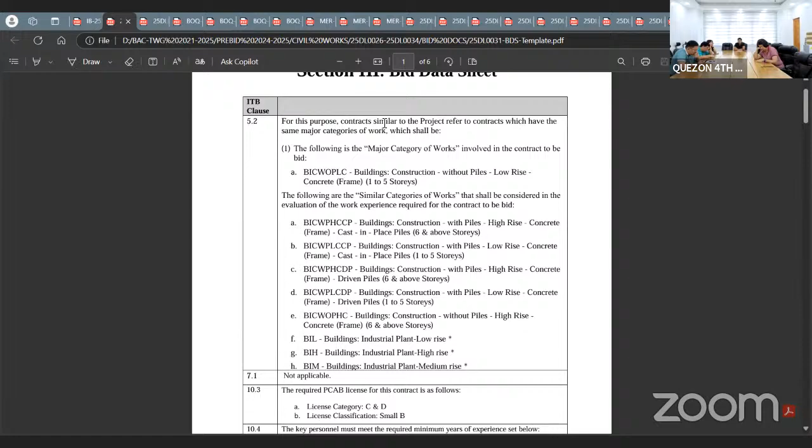Building construction with piles, high-rise concrete frame, driven piles, 6 and above stories. Building construction with piles, low-rise concrete frame, driven piles, 1 to 5 stories. Building construction without piles, high-rise concrete frame, 6 and above stories. Then building industrial plant, low-rise, medium-rise, and high-rise. So that is for contract ID 25DL0032 and 25DL0033.

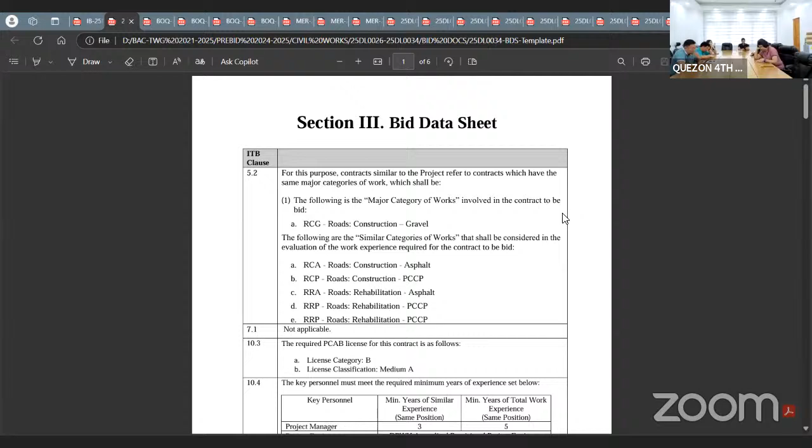Then meron din po tayong 2 construction of gravel road. So for contract ID 034, pareho po yung major categories requirement natin: road construction gravel. Then for the similar categories of work, road construction asphalt, road construction PCCP, road rehabilitation asphalt, road rehabilitation PCCP, and road rehabilitation PCCP.

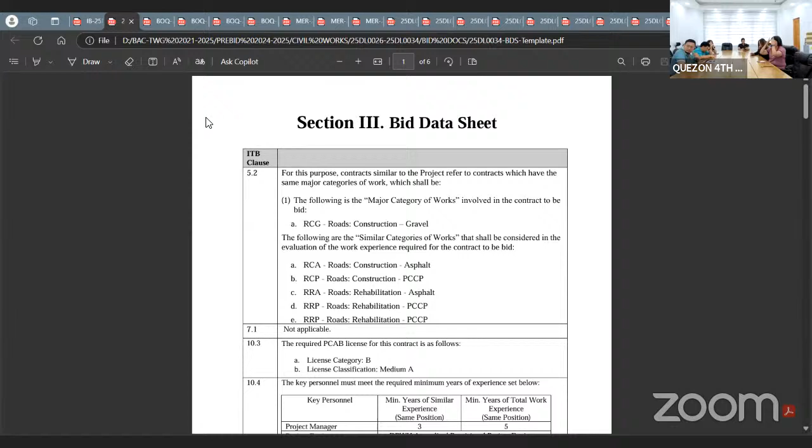Then for the bill of quantities, for the construction of concrete road, required items po natin: Part A, facilities for the engineer; B, other general requirements; C, earthwork; D, sub-base and base course; E, surface course; F, bridge construction; and G, drainage and slope protection structures.

This is for contract ID 25DL0026. So for Part A, facilities for the engineer: provision of field office for the engineer rental basis, provision of furniture, fixtures, equipment, and appliances for the field office for the engineer, provision of 4x4 pickup type service vehicle for the engineer rental basis, provision of progress photograph.

Then Part B: permits and clearances, project billboard, signboard, occupational safety and health program, traffic management, and mobilization/demobilization. Then Part C for earthwork: clearing and grubbing, surplus common excavation, structure excavation common soil, embankment from roadway, structure excavation common soil, subgrade preparation common material.

Then for the sub-base and base course, polymer stabilized sub-base course. For the surface course, Portland cement concrete pavement, unreinforced 0.28 meter thick, 14 days. Then for the bridge construction: metal railing grade 36 steel, structural steel works, reinforcing steel grade 40, structural concrete 27.58 megapascal cast in 14 days, structural concrete painting works in concrete class P, 16.5 megapascals. Then for the drainage and slope protection structures: formation drain, concrete slope protection, and drain pipe galvanized.

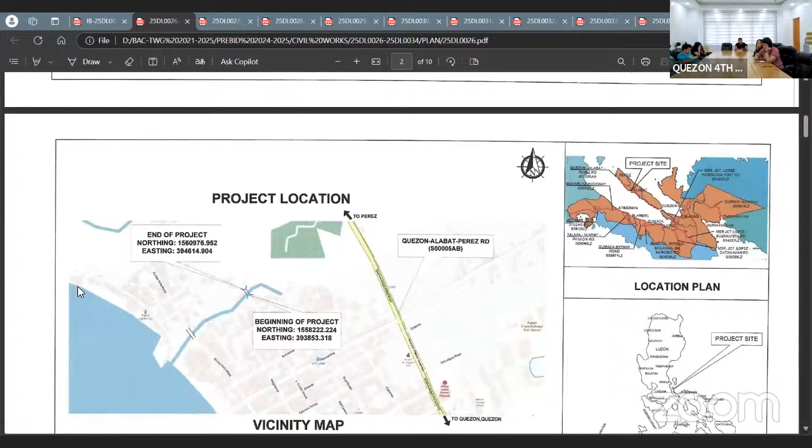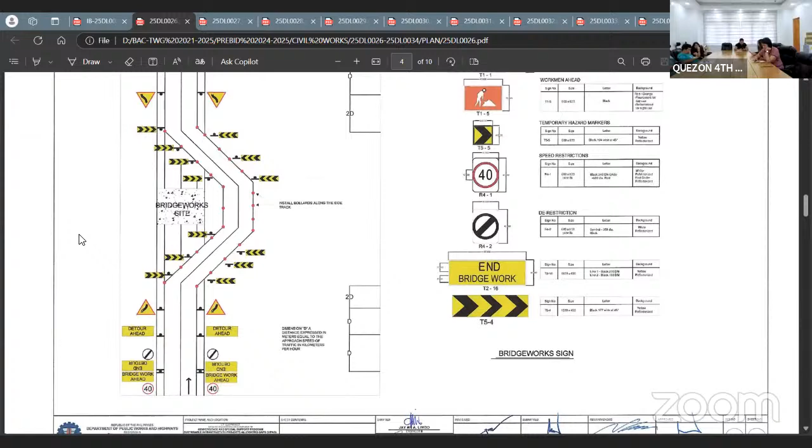Next, 25 DL0028, access road to Maharlika Highway in support of Agri-Based Industries, Calauag, Quezon, length of 210 linear meters.

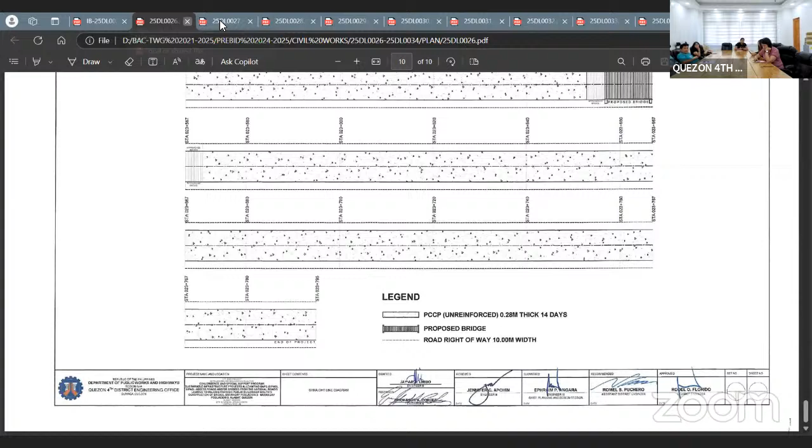Then next, 25 DL0029, access road in support of Agri-Based Industries, Lopez, Quezon, length of 210 linear meters.

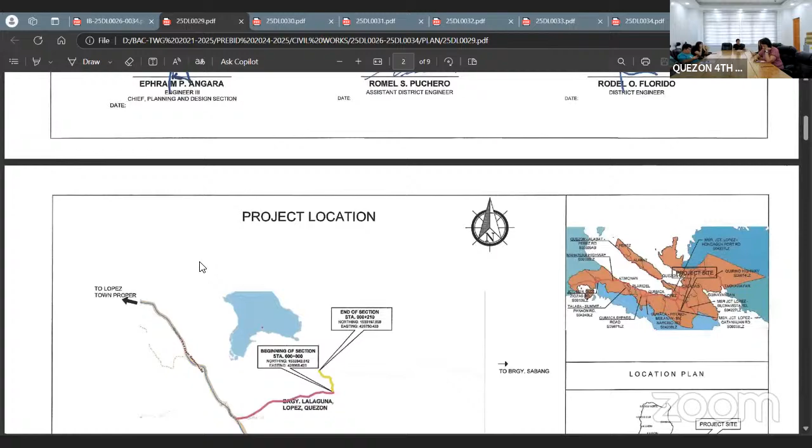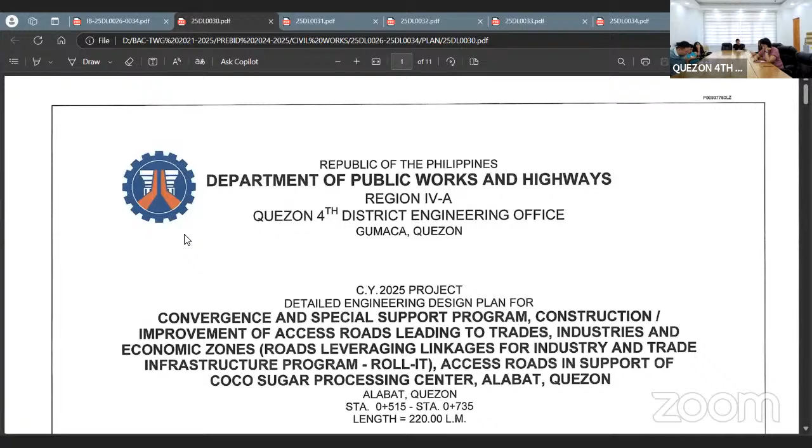Then 25 DL0030, access road in support of coco sugar processing center, Alabat, Quezon, length of 220 linear meters.

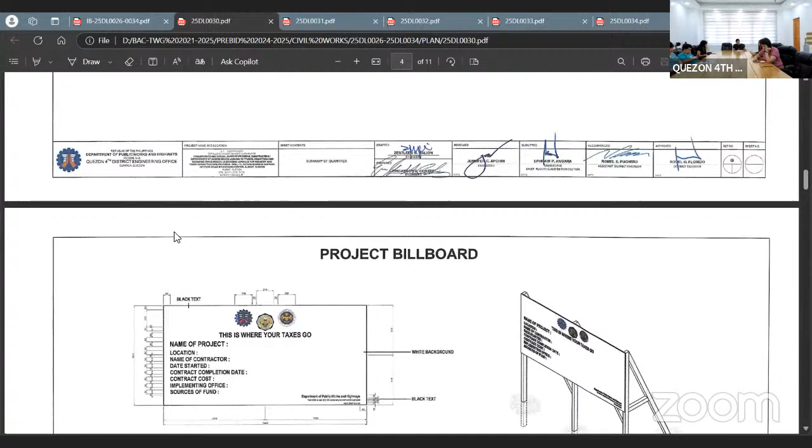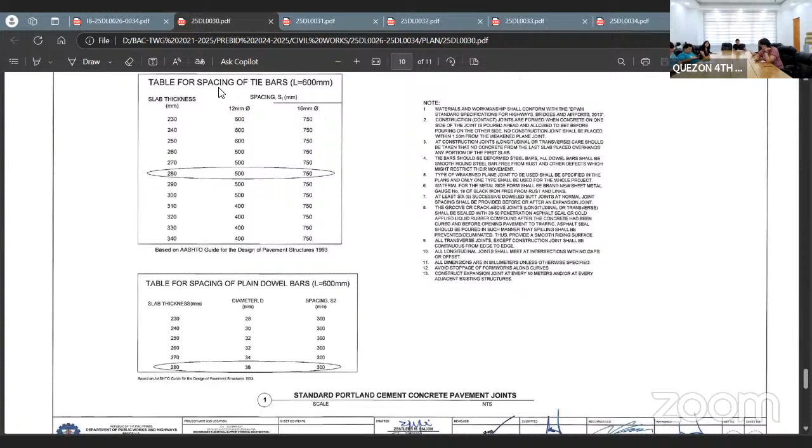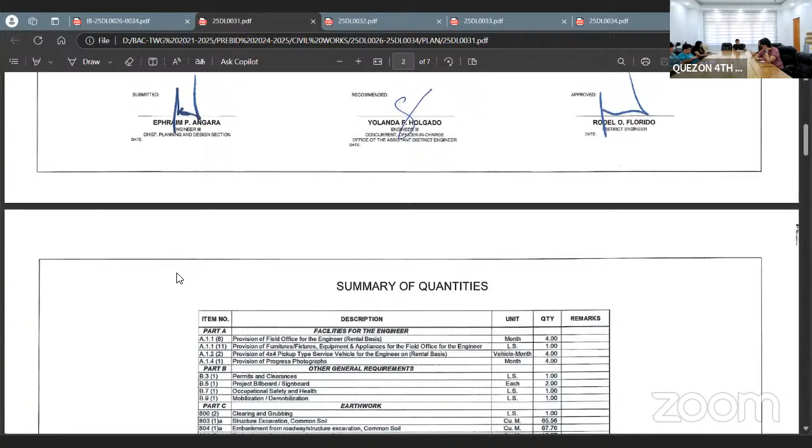Then for 25DL0032, multipurpose building, Barangay Talabating, Quezon, for an area of 77.07 square meters.

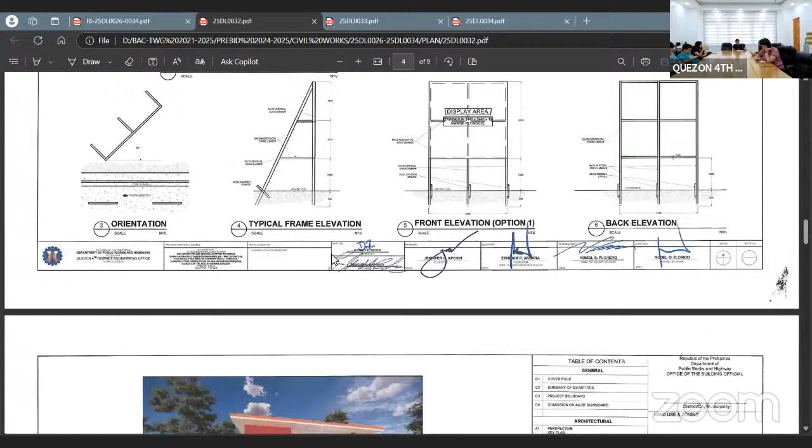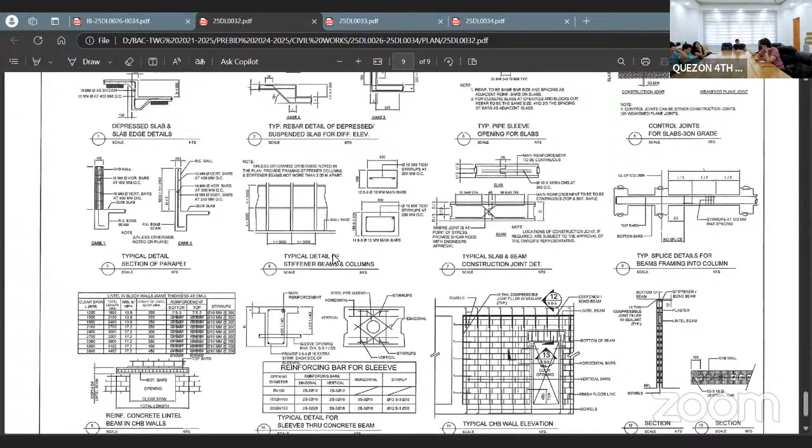25DL0033, multipurpose building, Barangay Villa Jesus Este, Alabat, Quezon, with an area of 205.54 square meters.

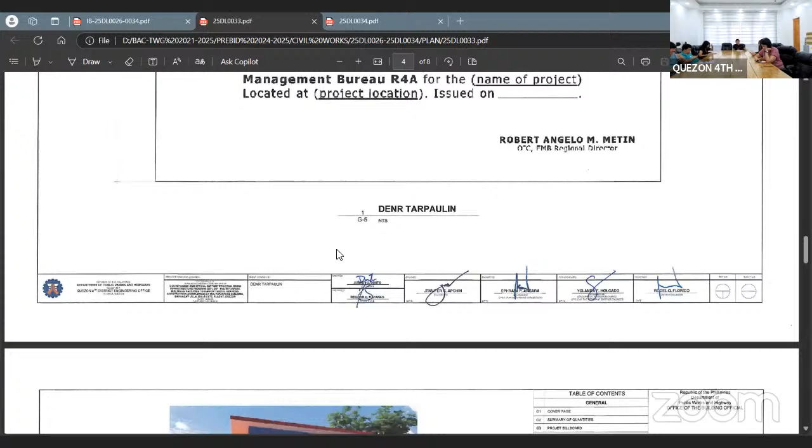And last contract ID, 25DL0034, construction of bypass and diversion roads, Guinayangan Tagkawayan Diversion Road, Tagkawayan Package A, Quezon, length of 2,300 meters. So, Jerpol, please note this on the first page of the plan.

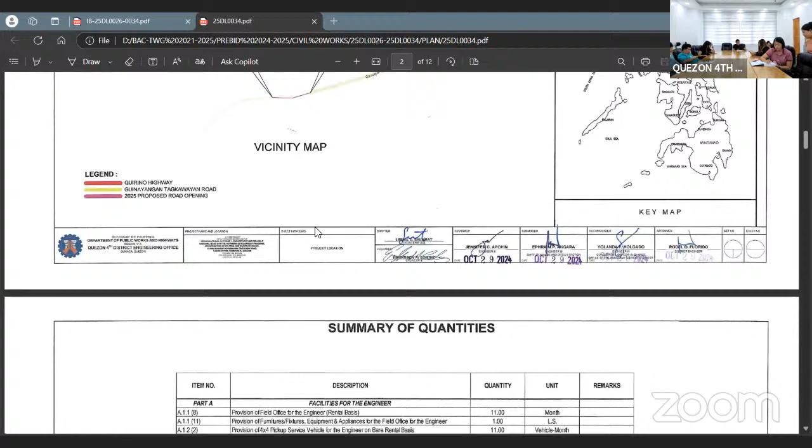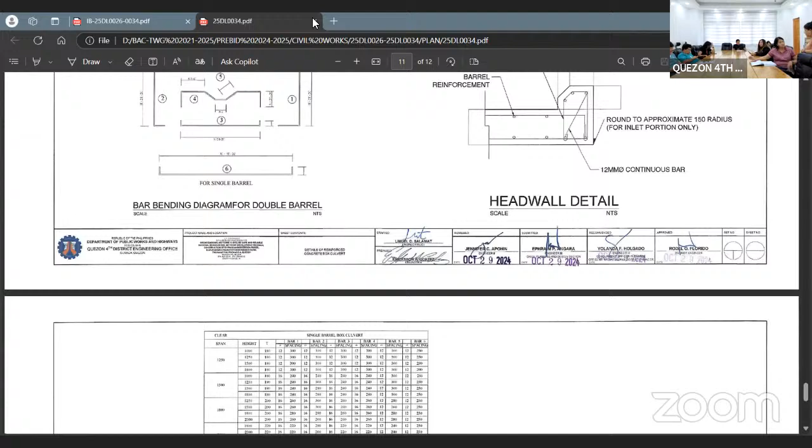Okay. Then, let's move to other matters.

So, number one, all authorized documents should have attached documentary stamps. Any missing documents not authorized will affect the registration of bids, with specified form and paper size for the bidding documents.

The required paper size is A4, as much as possible with pagination, ear tags, and table of contents. If there's no pagination, ear tags, and table of contents, as long as the bidder's representative acknowledges that this is how their bidding documents were packaged, we will accept their submitted bid - it is not grounds for disqualification.

Contractors are reminded that overlapping of the proposed key personnel and pledged equipment is a common cause of disqualification of the contractor. So in case there's an ongoing project, if the proposed key technical personnel is employed by the bidder and working on another project at the time of bidding, the bidder shall submit a certification that: one, the personnel will be pulled out from the ongoing project once the bidder is awarded the contract; and two, the personnel will be replaced with another person of equal or better qualifications as certified by the head of the implementing office, pursuant to DO 9, series of 2012.

The proposed key personnel and replacement must be named in the bidding document. Both the names of the key personnel and replacement should be attached in our technical bids so they can both be verified.

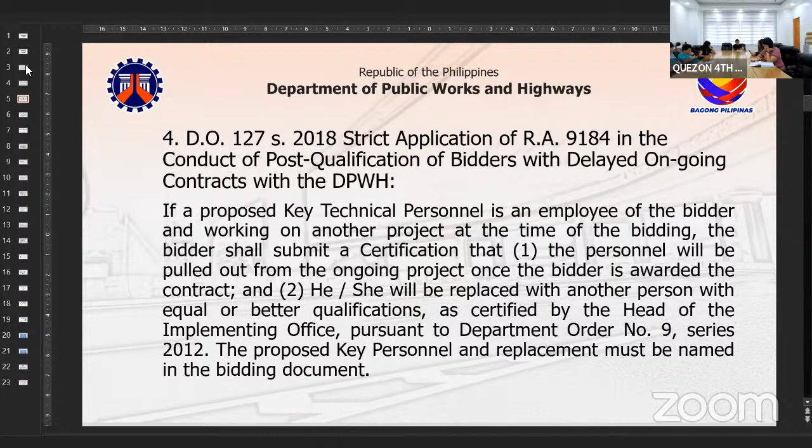At the time of the post-qualification procedure, the BAC verifies that any deficiency is due to the contractor's fault or negligence, pursuant to Section 34.3 of the 2016 Revised Implementing Rules and Regulations of RA 9184.

The procuring entity shall disqualify the contractor from the award without any right to reimburse fees and incidental costs paid for the procurement of the infrastructure contract subject of that bid.

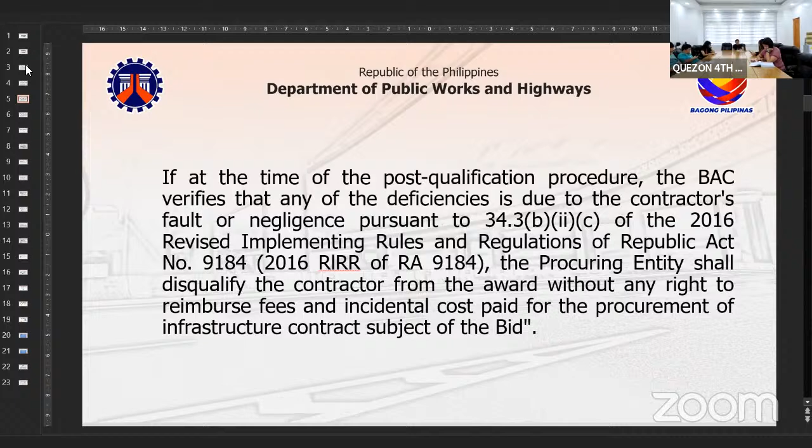If the grounds for the post-disqualification is based on the above requirements, the concerned BAC can issue a notice of post-disqualification to bidders that they shall not qualify to bid for any DPWH projects until and unless the reason for the post-disqualification has already been cleared by the concerned implementing office.

Upon presentation of the required documentary evidence, the concerned implementing office shall issue a certification if the contractor has already eliminated the negative slippages and other deficiencies.

However, nothing herein shall delay the procurement process of the concerned implementing office, in accordance with the periods provided under the 2016 Revised Implementing Rules and Regulations of RA 9184.

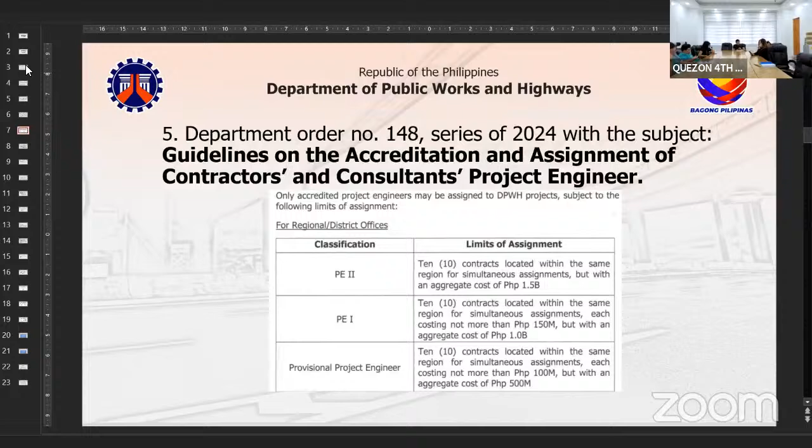So, until 10 a.m. lang po yung deadline ng dropping. Pakipresent na lang po ng resibo natin sa front desk guard para makapasok po tayo sa office premises.

So, hanggat maaari, bumili po tayo ng bidding documents in advance. Iwasan po natin bumili ng bidding documents sa mismong araw ng bid kasi baka po mali tayo pag-drop sa ating deadline. Pwede pong bumili ng bidding documents sa other district engineer office, sa regional office, or sa central office. So, i-present lang po ulit ng ating resibo sa front desk guard.

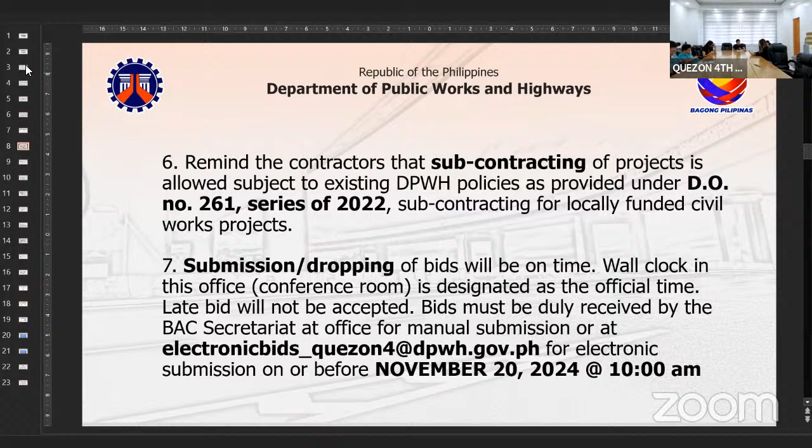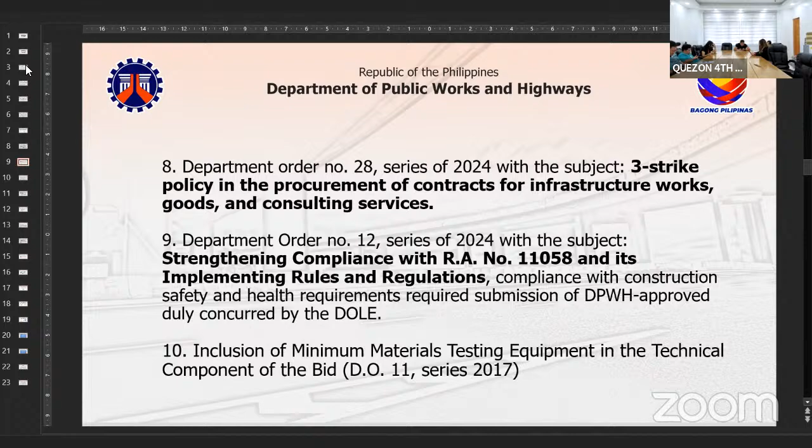Department Order 28 series of 2024 for the three-strike policy. Department Order 12 series 2024 for the compliance ng Occupational Safety and Health Program. Usual minimum materials testing equipment for the DOs, kasama po sa ating requirements ng technical bid ang minimum testing material. Sa under DO 11 series of 2017, then there's permit as part of the eligibility requirements. Department Order 153 series of 2015 for the Precedence Diagram Method. Department Order 105 series 2020 for the transparency and accountability.

So kasama din po yung Department Order 6 series of 2024 for the YouTube live streaming. So, all pre-bid conference and bid opening po natin, naka-live stream po tayo sa ating DPWH Quezon 4th YouTube channel. For the bidders na gustong mag-participate online, paki-notify lang po yung office para mabigyan po namin yung Zoom link.

And all bids na issue or requirement activities. So, Department Order 7 series 2020 for the electronic submission and receipt of bids. So, yung guidelines for the electronic submission. Then, without prejudice, the provision of RA 3019 and other penal laws. Penalties and offenses covered all types of procurement, whether done manually or electronically. Pursuant to Rule 21, Penal Section 65, offenses and penalties of the 2016 revised implementing rules and regulations of RA 9184. So, Department Order 10 series 2015 for the ICT.

And for the bidders po na gustong mag-request ng site inspection, paki-notify lang din po yung office para makapag-schedule po tayo ng site inspection. All prospective bidders present their representative to present their contractor information together with their company ID. Authorization letter should not be accepted.

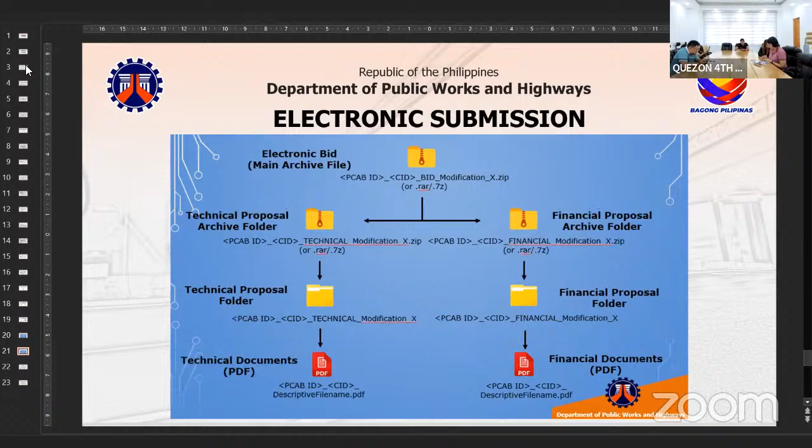The advisory to our valued clients: the office is still implementing no appointment, no entry policy. Clients, including bidders, may schedule their visit at this address and then submit the accomplished form to the office concerned at least 1 day before the scheduled meeting through email address vacationportdeo@yahoo.com.ph. Forms for visitors must also be provided at the front desk guard for walk-in clients, but the entry will still depend on the approval of the office concerned.

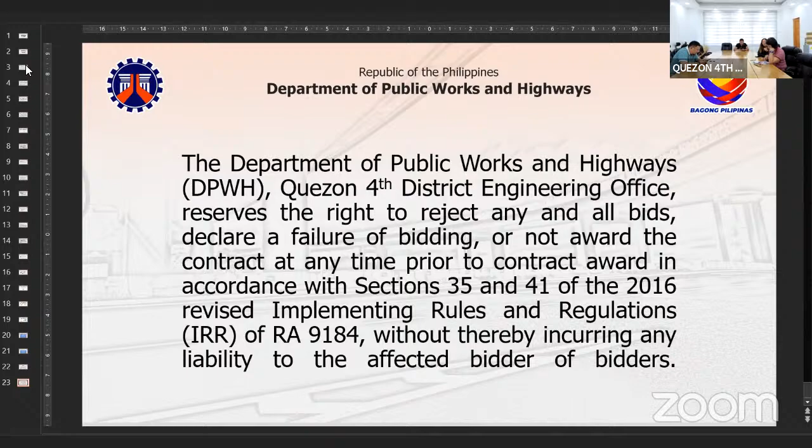So the Department of Public Works and Highways, Quezon 4th District Engineering Office reserves the right to reject any or all bids, declare failure of bidding, or not award the contract anytime prior to contract award in accordance with Section 35 and 41 of the 2016 Revised Implementing Rules and Regulations of RA 9184, without thereby incurring any liability to affected bidder or bidders.